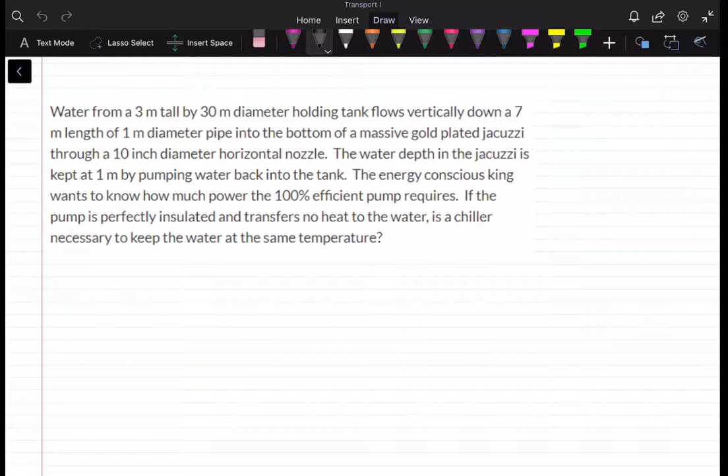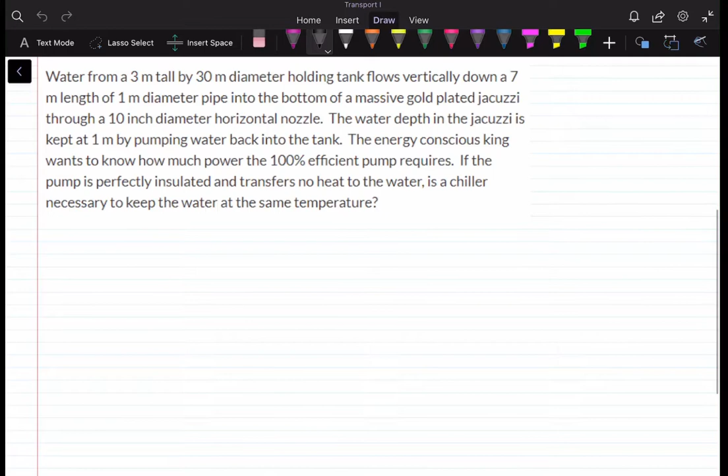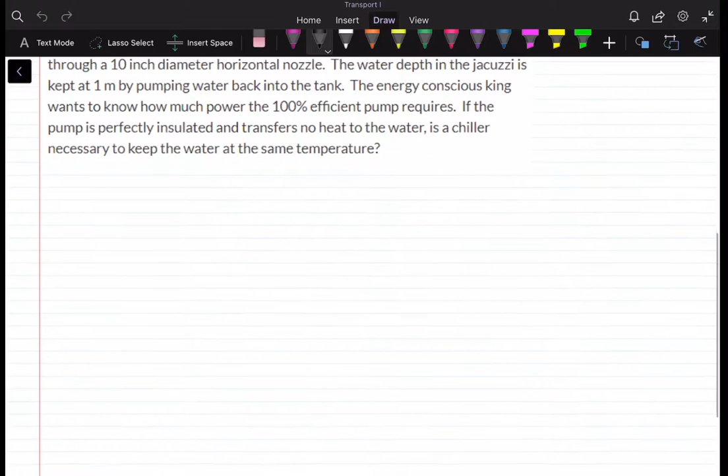So this is the problem statement, and we're asked for two things. It says water from a 3-meter tall, 30-meter diameter holding tank flows vertically down from a 7-meter length of 1-meter diameter pipe into the bottom of a massive gold-plated jacuzzi. So the first thing we need to do is draw a diagram for this.

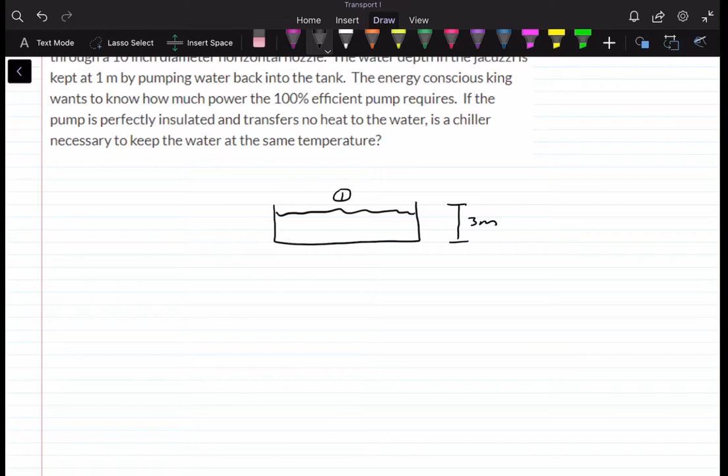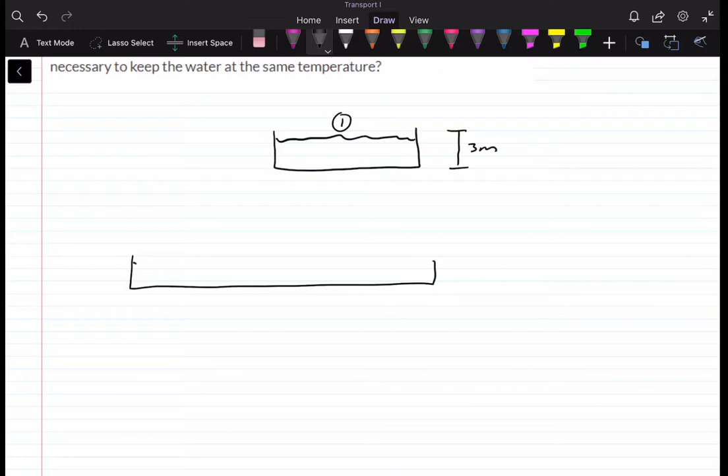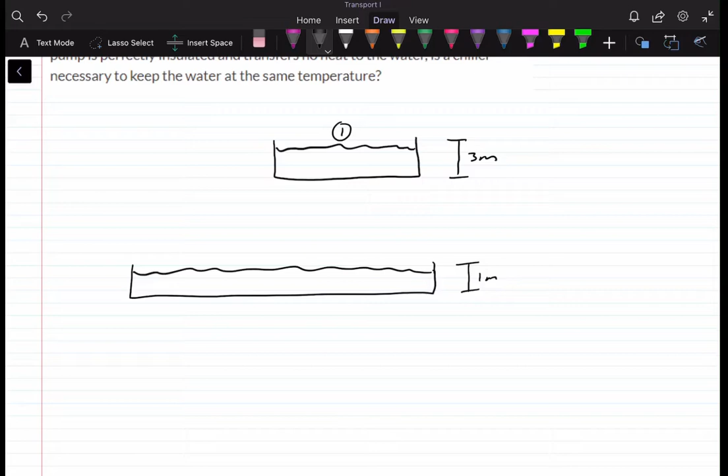I'm going to start with the holding tank. We know that this is 3 meters tall. Say this is our water level, and we'll label this as point 1. And this is going to flow down to the jacuzzi, which we'll just put right down here. We know that our jacuzzi is 1 meter tall, and we're going to have a pipe flowing vertically downwards going into the bottom of the tank. We'll label this as point 2 of our system.

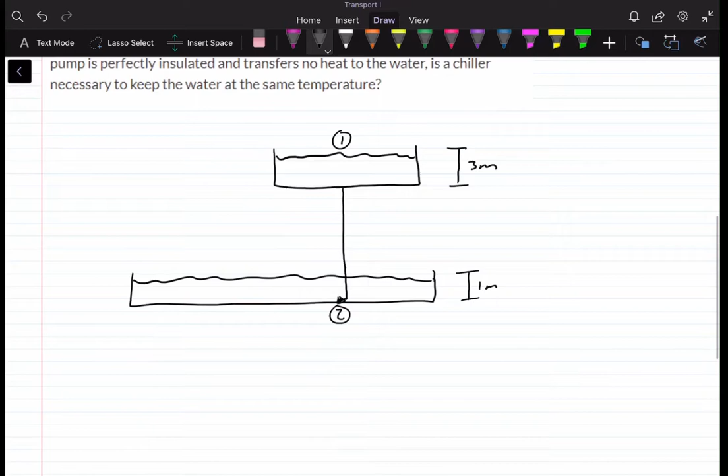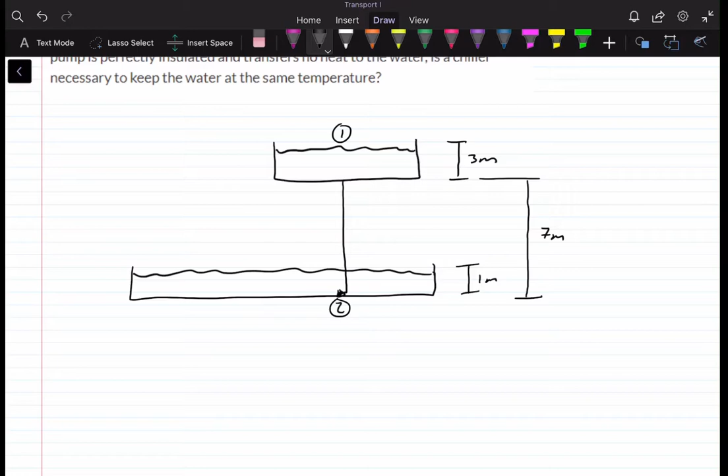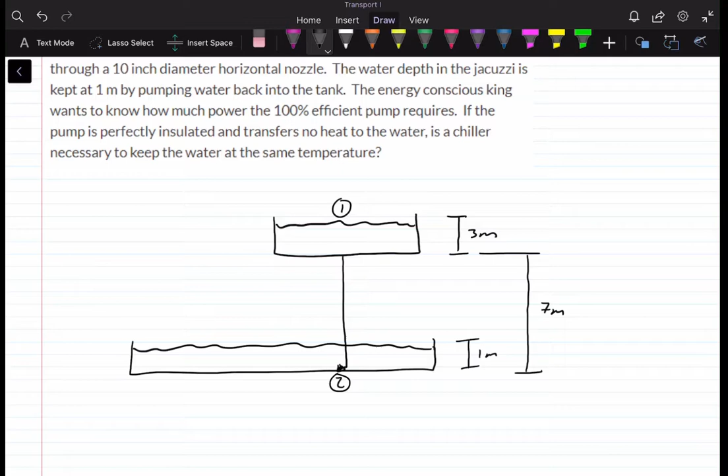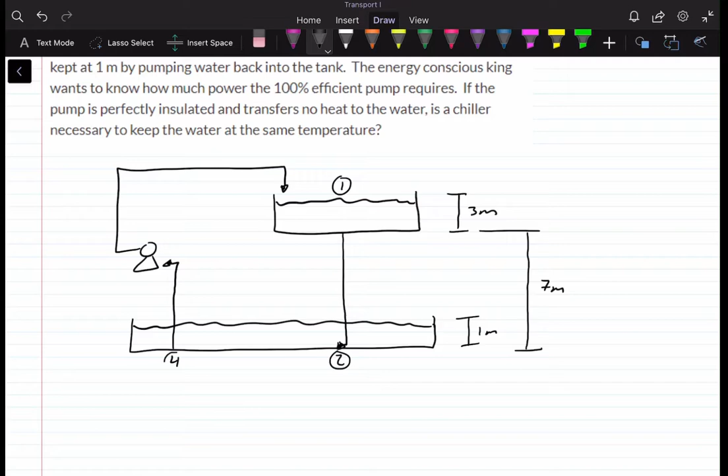We're also given that this is a 7-meter length of pipe, so from this point to the bottom of this tank is 7 meters. We're also given that it's pumped back up by a 100% efficient pump to this holding tank. So if this is our pump here, it's pumped from the bottom of the tank up to here and back into the holding tank. We're going to label this as point 4, and this as point 5.

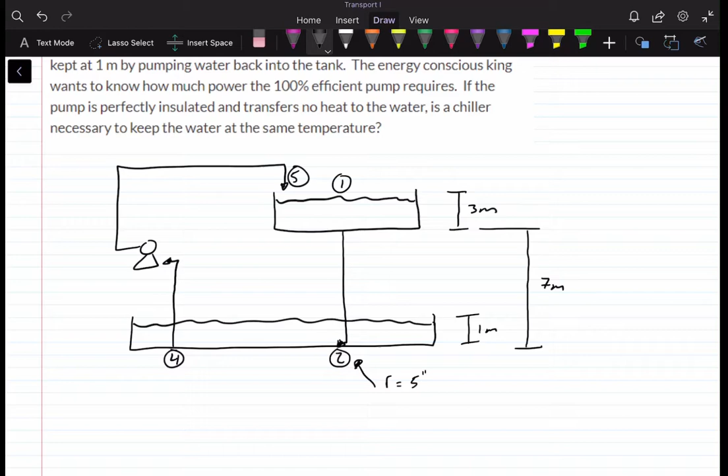We're also given that the diameter of the nozzle, there's a nozzle here at point 2, the diameter is 10 inches, so I'm just going to use the radius of 5 inches. The pipe has a diameter of 1 meter. I'll label that here, equals 1 meter. Yeah, all of these are 1 meter.

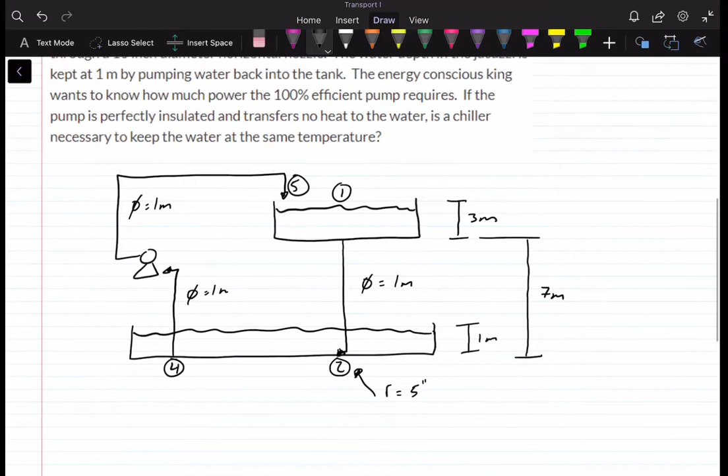Okay, so that's our situation, that's what we're given. And it says, if the pump is perfectly insulated and transfers no heat to the water, is a chiller necessary to keep the water at the same temperature? And also, it wants to know how much power the 100% efficient pump requires.

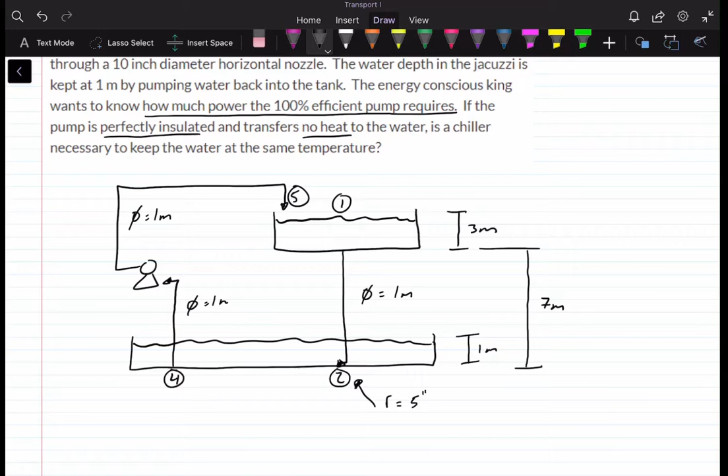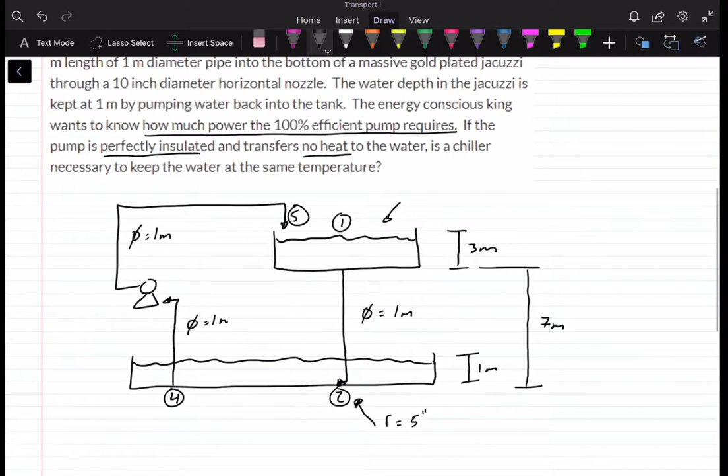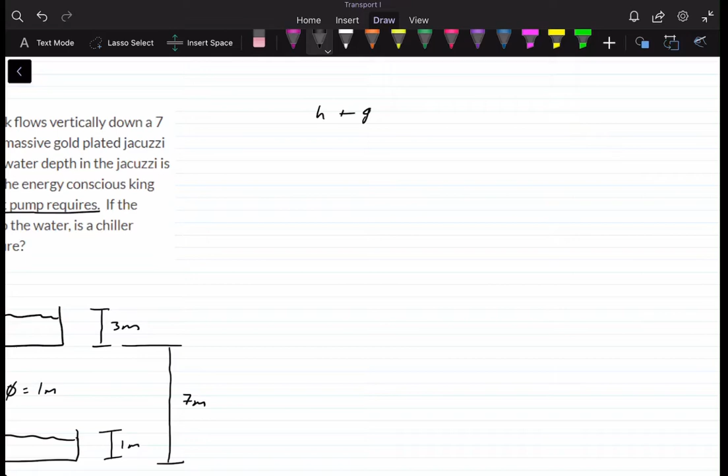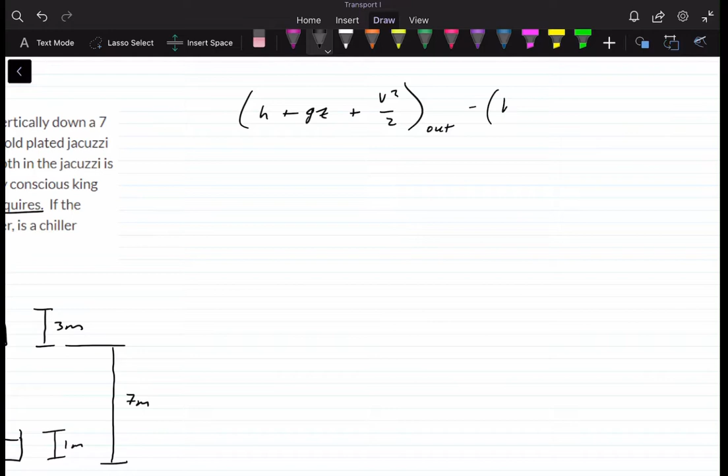So first we need to find the power, and we know that this has to be a steady flow, open system. This is exposed to the environment right here. So what we can do is set up our equation: H plus GZ, V squared over 2 out. This is the equation for steady flow open systems, and that equals dq over dm plus the non-flow work over the change of mass.

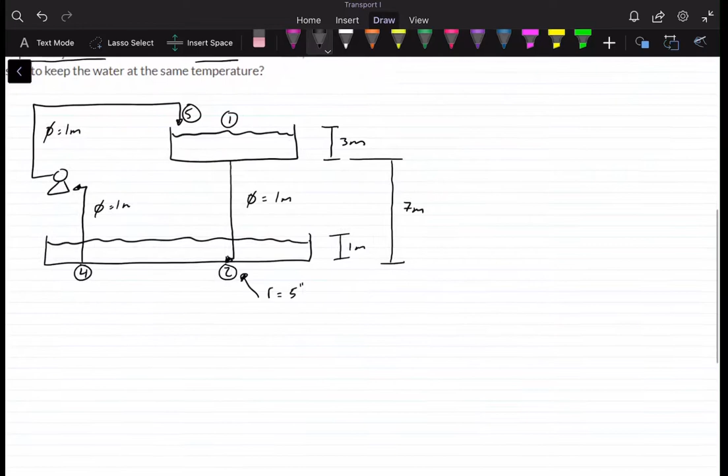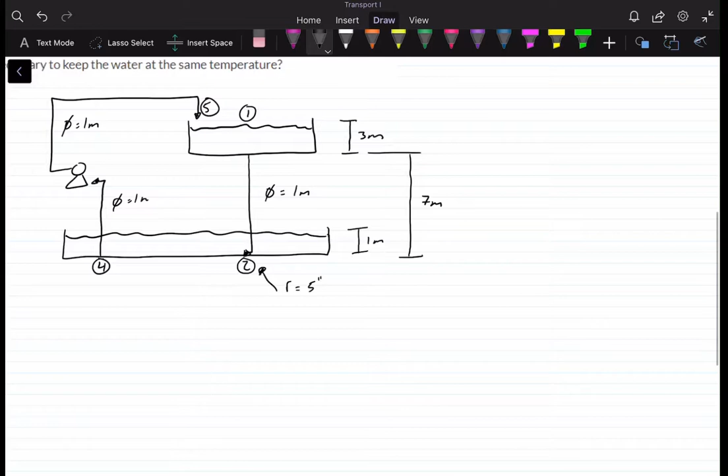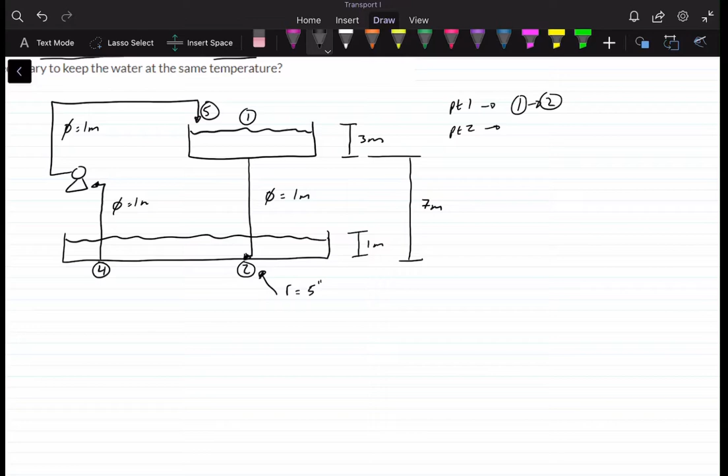So we're going to solve this in parts: from point 1 to point 2, and then from point 4 to point 5. So essentially we'll have 3 parts. Part 1 is from 1 to 2, and part 2 is from 4 to 5 — I'll label this 4 since 3 is just an intermediate point, chilling in the jacuzzi. It's a dummy mistake, misnumbered it, but it's cool, we'll go with it. Part 3 is just going to be us solving for power. That's our plan.

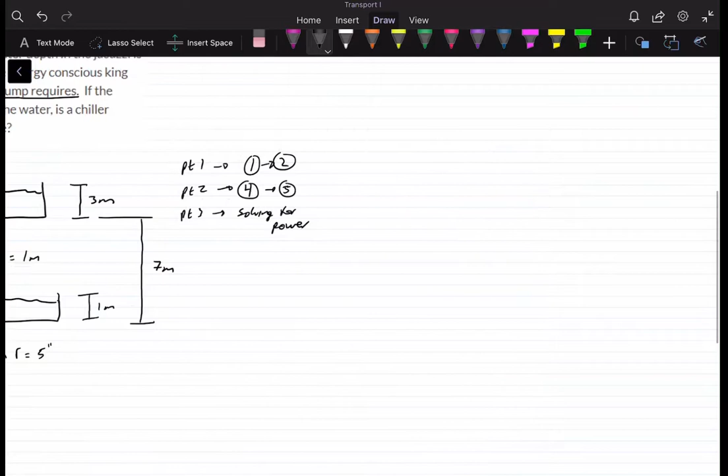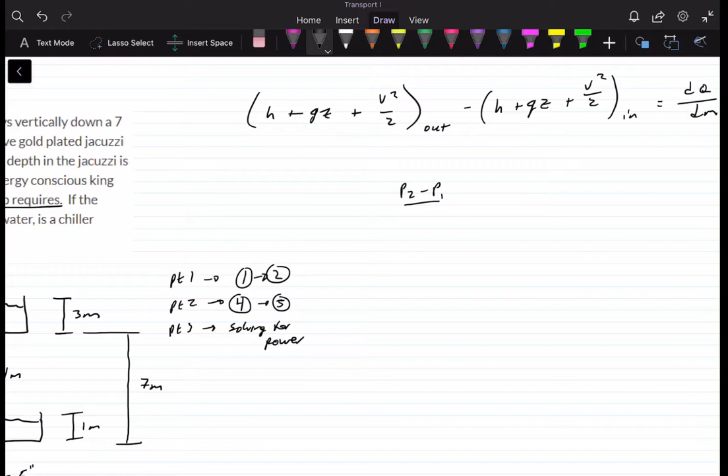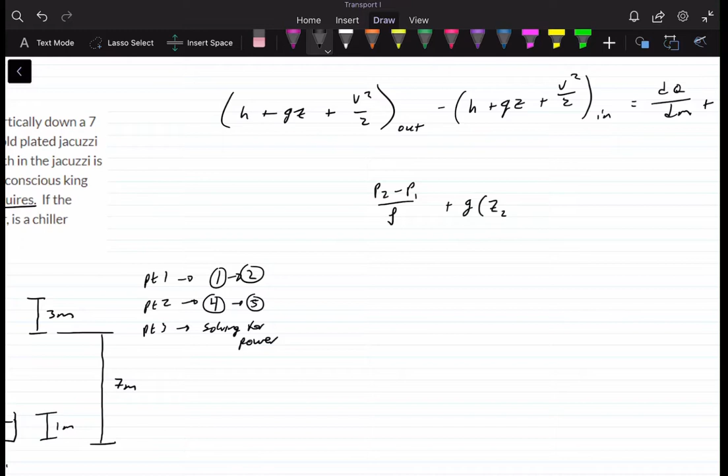So with this equation, to find H here, we can do P2 minus P1 over rho, plus G times Z2 minus Z1. I'm just going to combine these — this is out and this is in, so I'll make it all one thing. Then we'll do plus V2 squared minus V1 squared over 2, and our flow rate isn't going to change since it's all in the same pipe. We also don't have non-flow work, so that's equal to 0.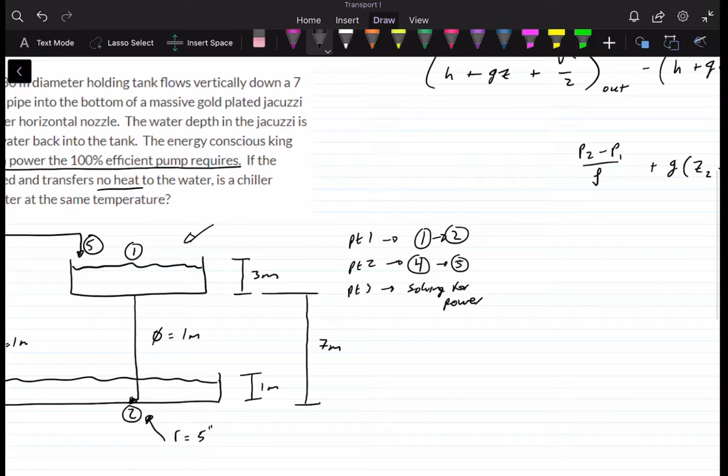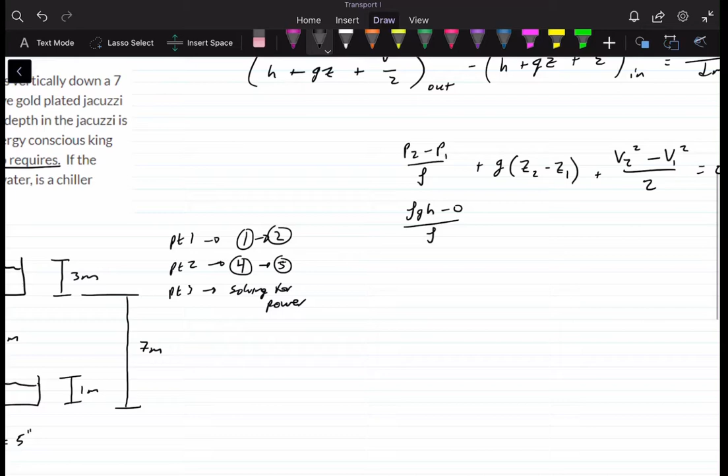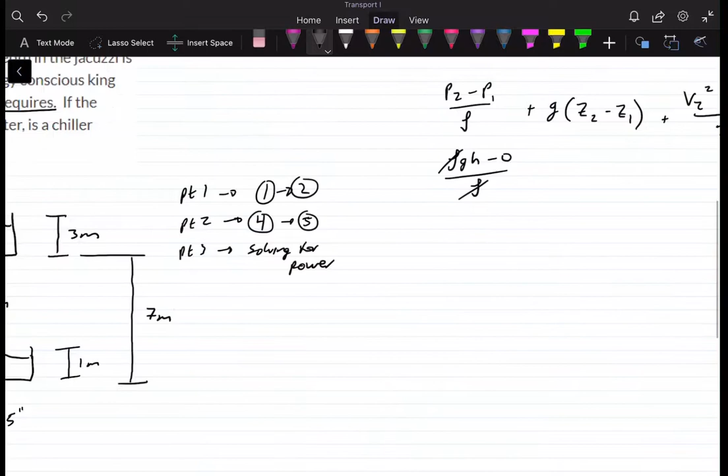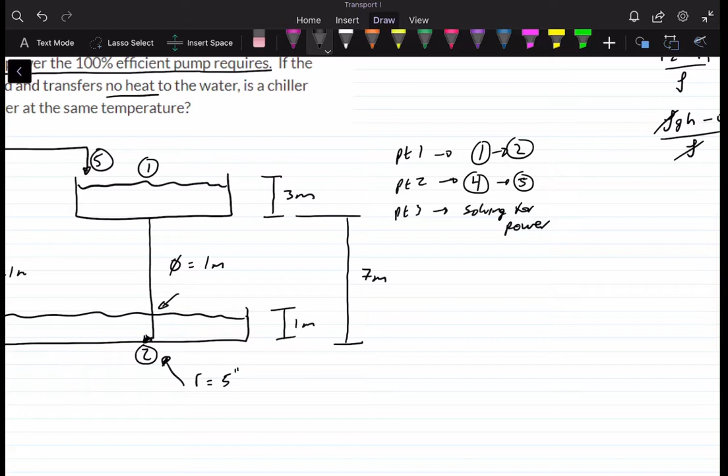And the pressure P1 we can assume to be 0 because it's open to the environment — that's negligible. And pressure we know is rho GH, so we're going to have rho GH minus 0 over rho. This rho cancels, so we're left with GH. This H here is going to be measured from this point down, because the only part that matters is where it's in the water.

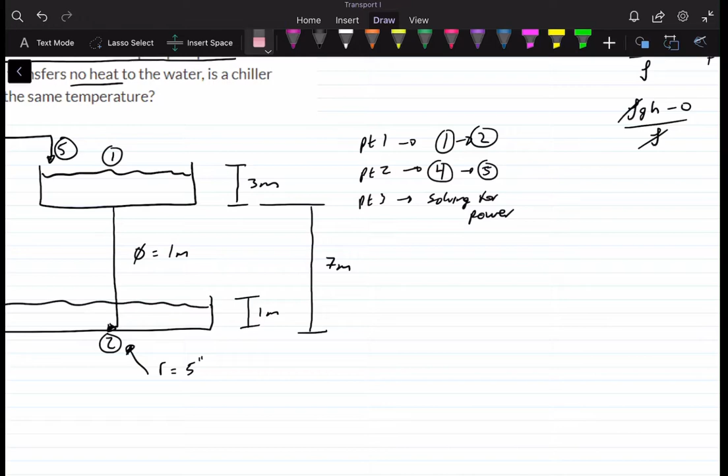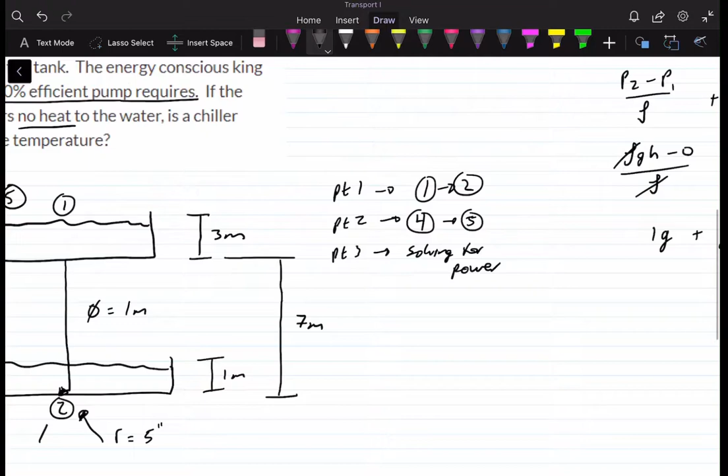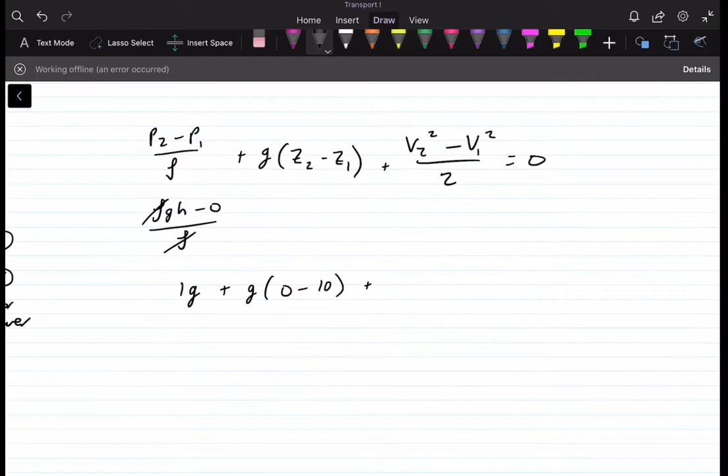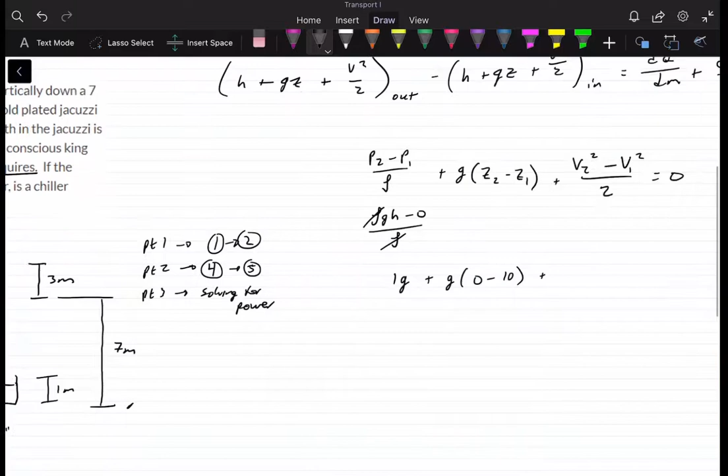So that's going to be 1 meter. Technically we're just left with GH, so GH plus G, and I'll go ahead and fill values in. So we have 1G plus G times Z2, the height at 2, which is 0 right here. So 0, and Z1 is going to be 10, because the height of the tank is 3 meters and the height of the pipe is 7, so this is the bottom, so it's 10. So 10 plus V2 minus V1. Now V1 is at a very big tank, like the holding tank, it's very large in diameter, it's 30 meters. So the velocity at that point is negligible compared to what we're solving for at V2, so we can approximate that at 0. So plus V2 squared over 2 is equal to 0.

And so here we can get negative 9G plus V2 squared over 2 is equal to 0. Now we can solve for V2, that gives us an unknown. So then we have V2 is equal to square root of 18G. So that's part 1, done. That gives us the unknown there.

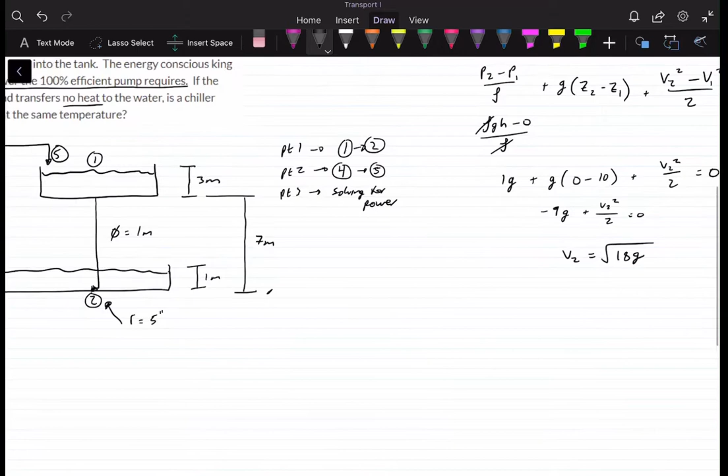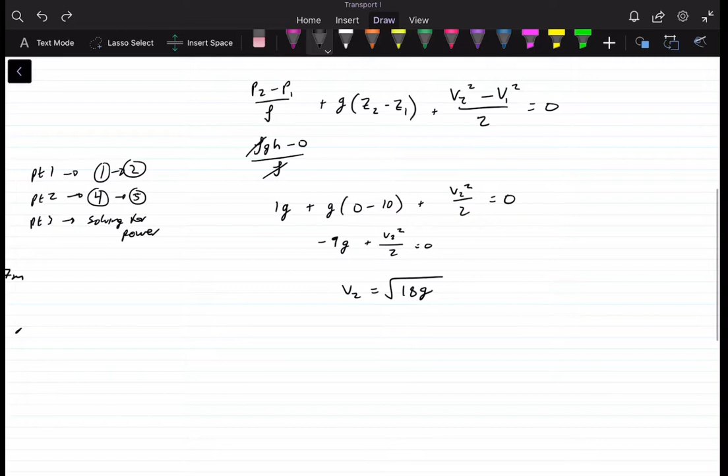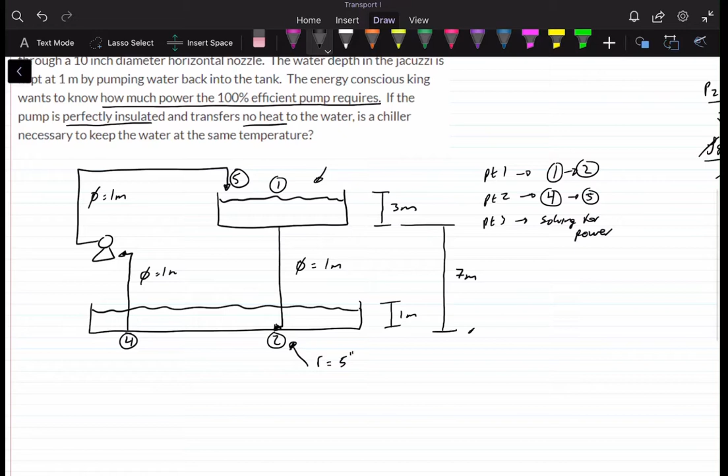And now for part 2, from 4 to 5, it's essentially the same thing. The difference here is we're not going to have this term, that's just going to cancel, because this pump is going to be pumping it from here to here, so all of this has to be moving at the same velocity. It's not like before, where it was open to the environment, so it mattered. But this one, they're both in the pipe and at the same velocity, so it just cancels. So we're going to have kind of the same equation: P5 minus P4 over rho, plus Z5 minus Z4.

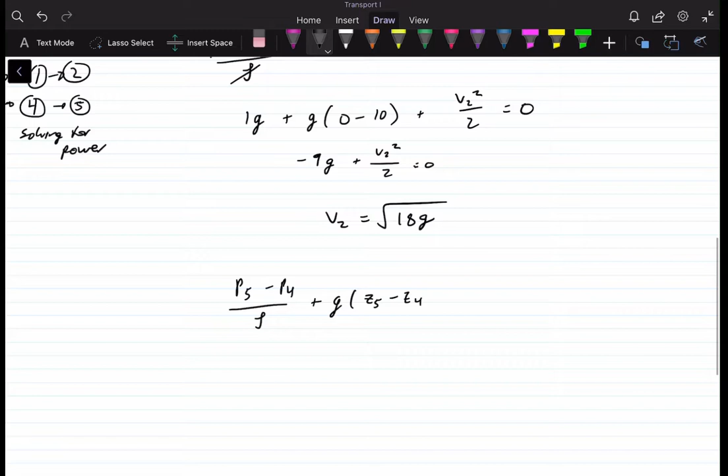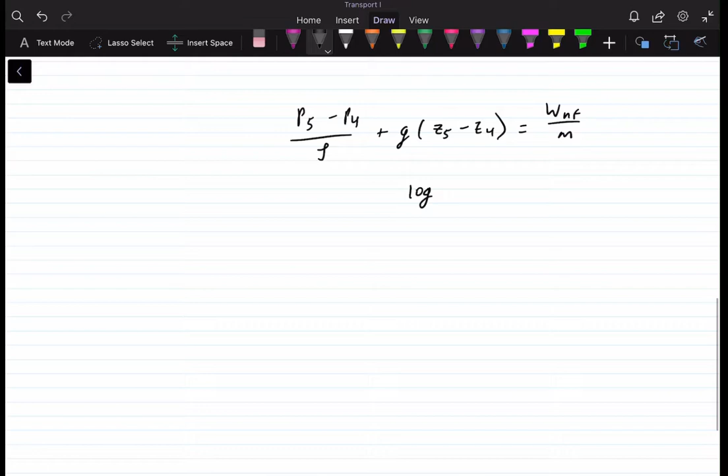And here, because we have the pump, we're going to have non-flow work, so work non-flow over mass. We know that Z5 to Z4 is from the top to the bottom again, but the difference here is that it's flipped, we're going the opposite direction, so this is going to be 10, so 10G there. And P5 and P4... hold on, wait a second. Yeah, P5 and P4 are going to be the same for this circumstance.

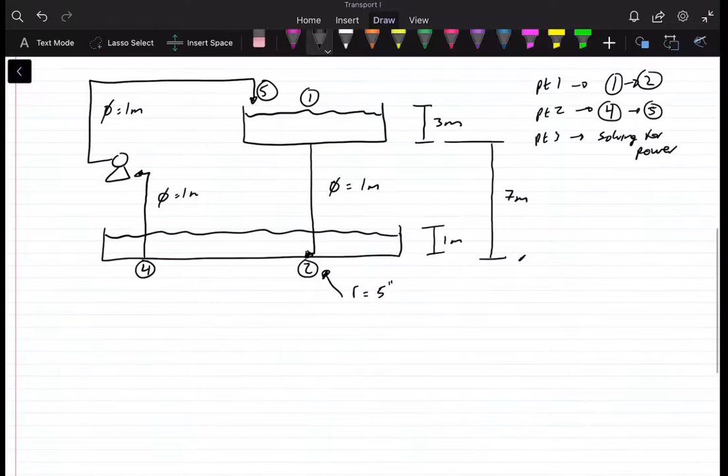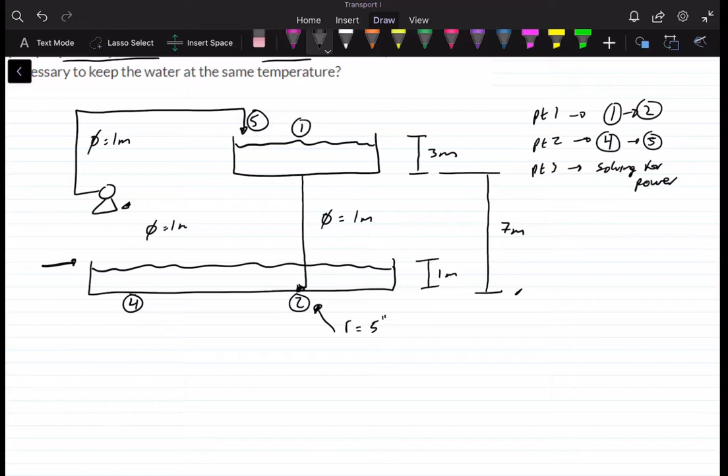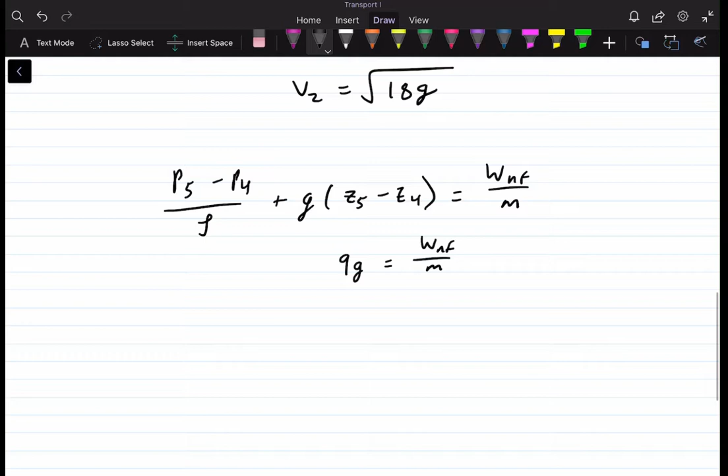But the difference is the fact that here, actually this is not going to be 10G, that's going to be 9G, because we're worried about this guy, it's being pumped out of here. This is pumped out of the top, so this is going from this point, not there, from this point up to the top. So that's 9. So this is going to be 9G, is equal to the non-flow work. So that gives us another unknown here.

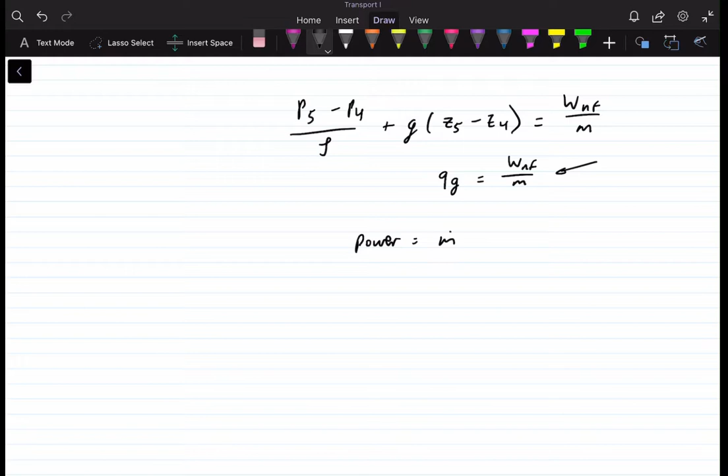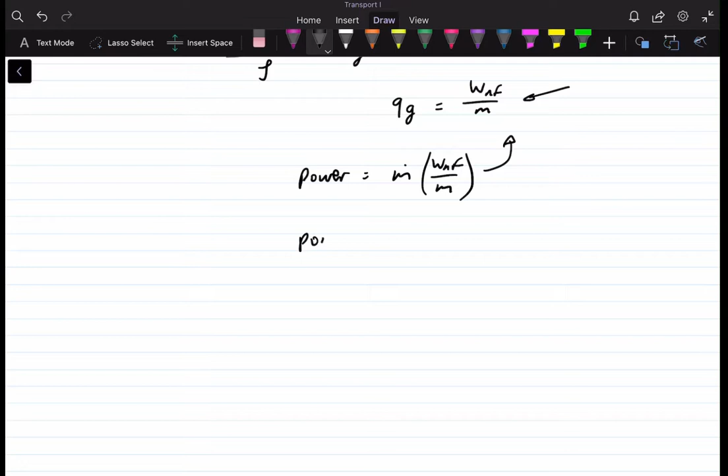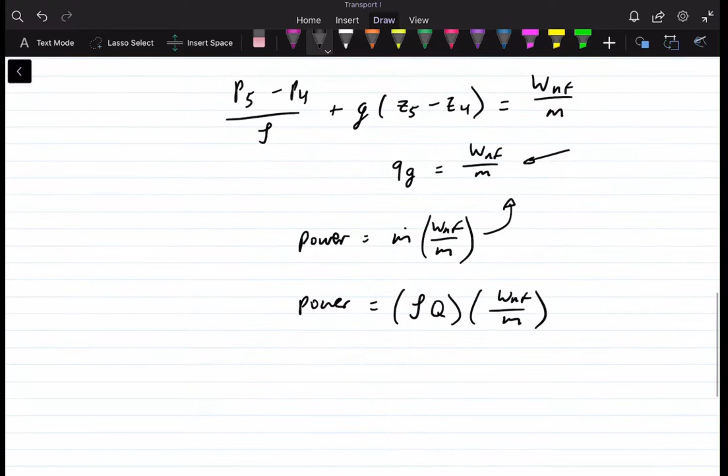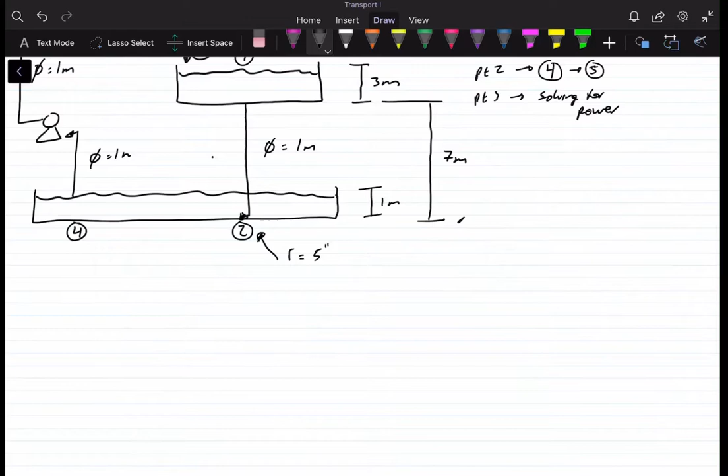And the power equation, so that's part 2. Part 3 is actually going to be calculating the power, and we know that the power equation, power is equal to m dot times work non-flow over mass. And we've got this guy here, so we can plug that in, but we don't have this. Lucky for us, we know that mass flow, let me rewrite the equation, mass flow is density times volumetric flow, and Q is equal to VA. And since Q equals VA in this situation, we're looking for the power for the pump, and we're bottlenecked by this point here, that's the point we refer to, which is nice because we just solved for Q equals VA. So we know that power is going to equal

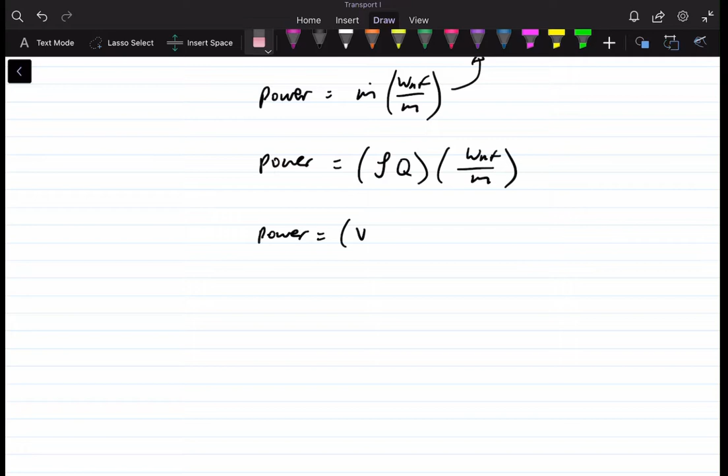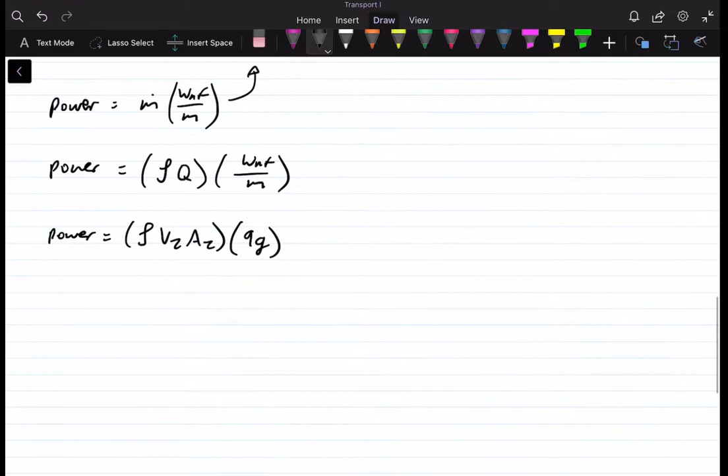V2, rho V2 A2. I'm going to go ahead and plug this in, 9G. And so first what we can do is go ahead and solve for this term. We know that the radius of the pipe or nozzle at point 2 is 5 inches, so 5 inches times 2.54 centimeters, just converting things here to meters so they're all the same, and we can get it in watts. So 1 meter per 100 centimeters, that gives us a meter there, and that's going to be equal to 0.127 meters, so that's our nozzle radius. And then we know the density of water, rho, is 1,000 kilograms per meter cubed, times our cross-sectional area here, so A2.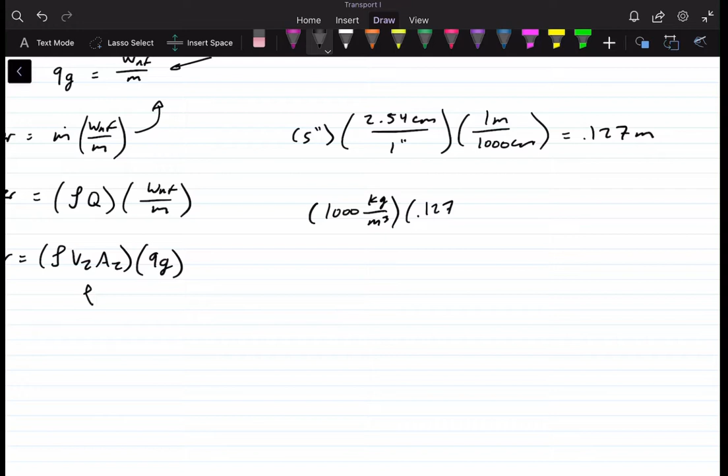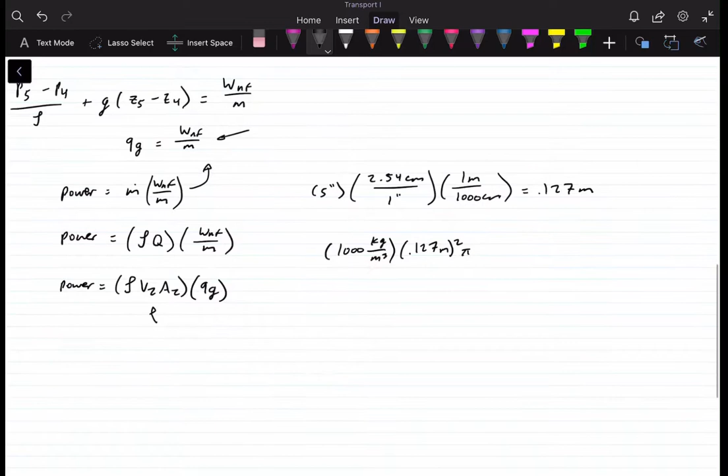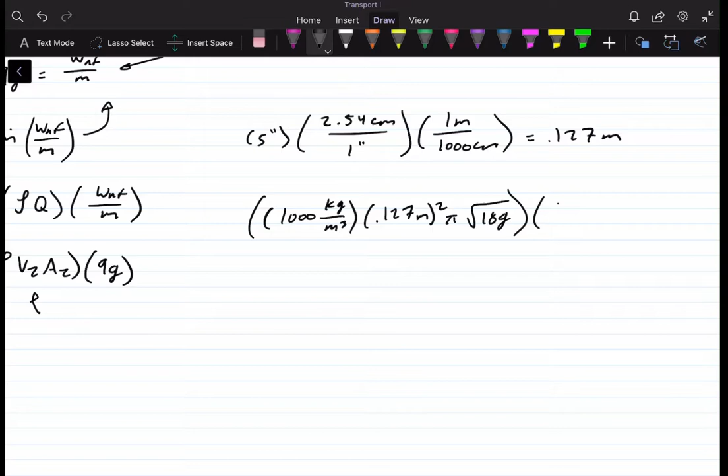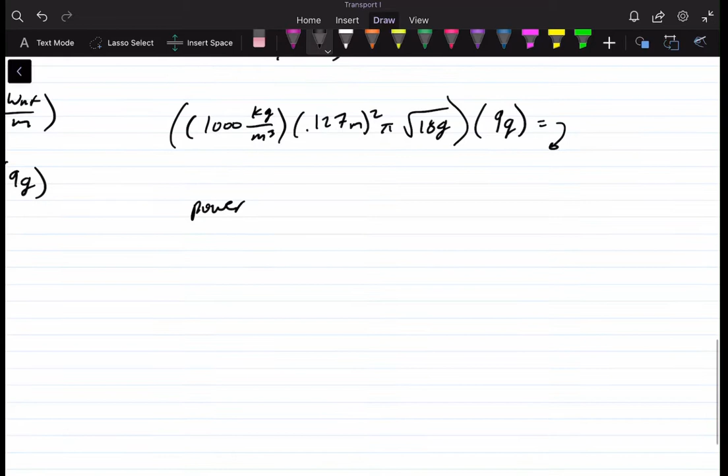That is going to be 0.127 meters squared times pi, and then times V2, which is square root of 18g, we solved for that up here. So square root of 18g, and that's going to be multiplied by 9g, which is our work non-flow over mass. Just plug in the values there. And then from that, we're going to get that the power, this right here, is going to be equal to 59,448.3 watts, or I'll round to 59.45 kilowatts.

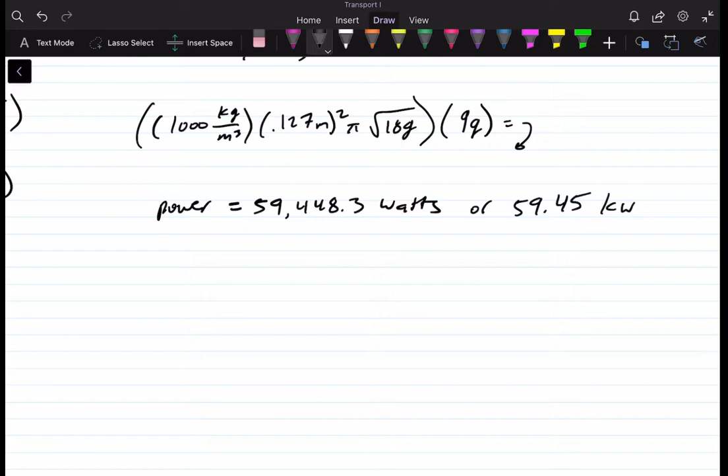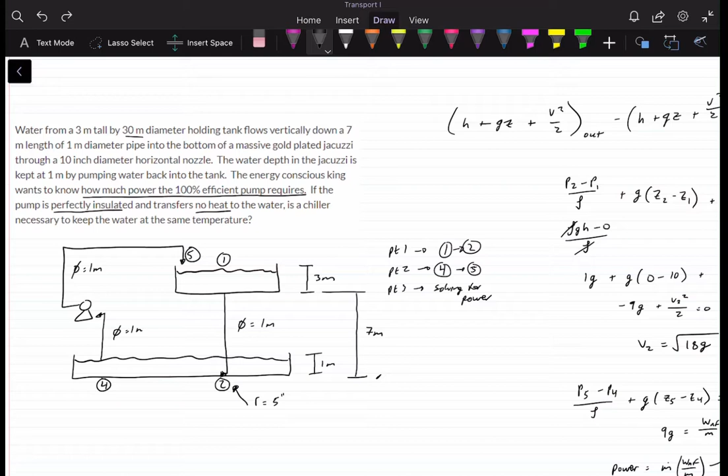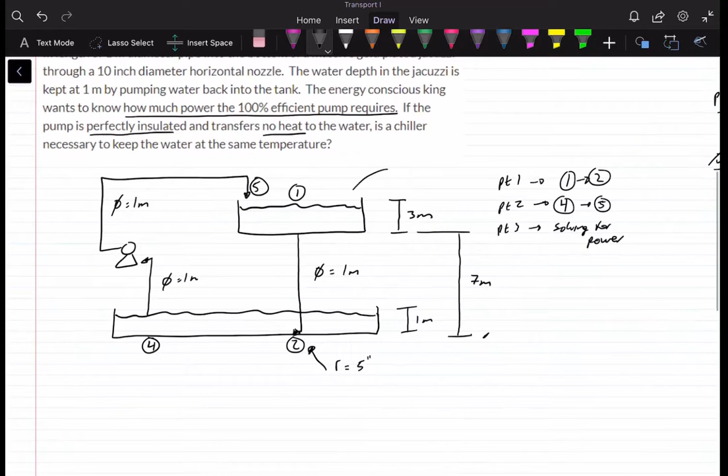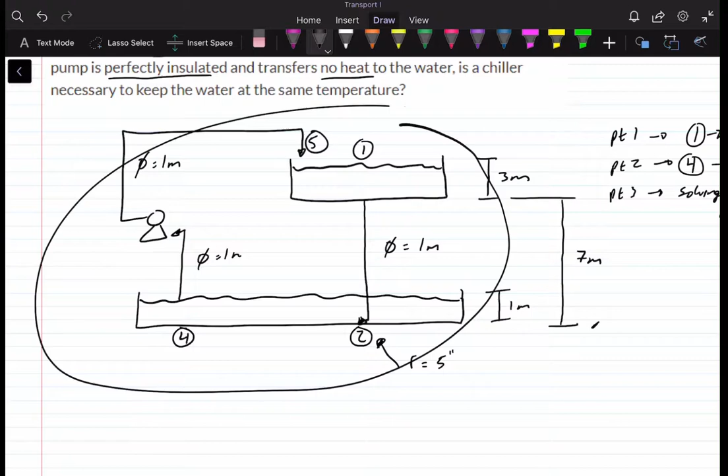Now, the second question asks, if the pump is perfectly insulated and transfers no heat to the water, is a chiller necessary to keep the water at the same temperature? And no, a chiller would not be necessary to keep the water at the same temperature. It's open to the environment, that's going to be one factor, and that's the only thing that's really going to be affecting the temperature of the water, since this is perfectly insulated. And since it's cycling through this entire system, that's good enough, there's no chillers necessary. And that's it.